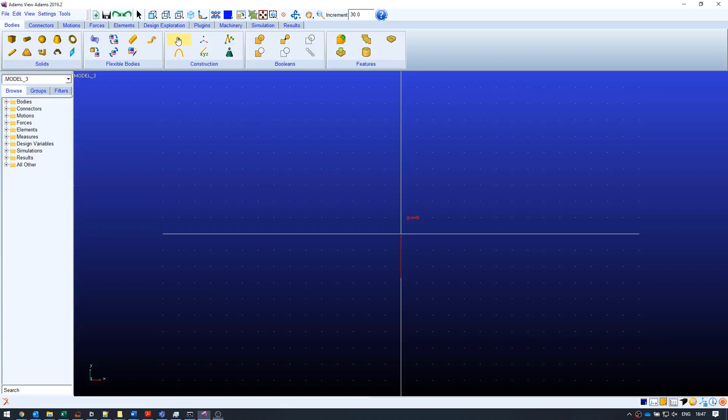We begin by creating 2 points to create a parametric model, and then we create markers on those 2 points. We will use these markers to define the beginning and ending of the beam. Now we start the Create FE wizard.

Select the define using 2 points option, and we select those 2 markers that we have created.

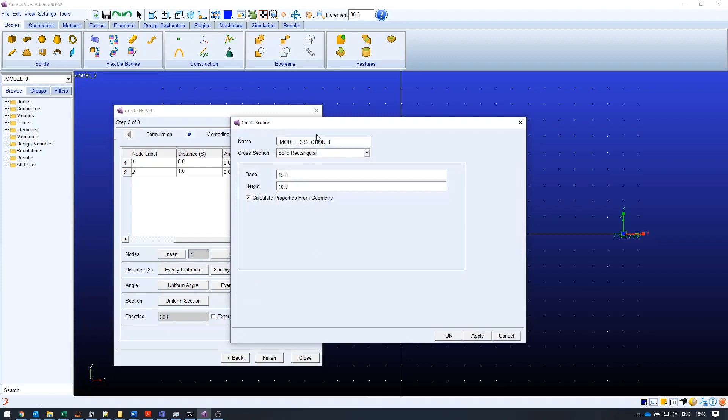Next form, where we now define the beam section. In the beam section we have various options, and we select the I-beam and provide dimensions.

You define the same section for the other point and preview the dimensions that you've provided. Now we can look at the model in more detail with a preview of the beam section.

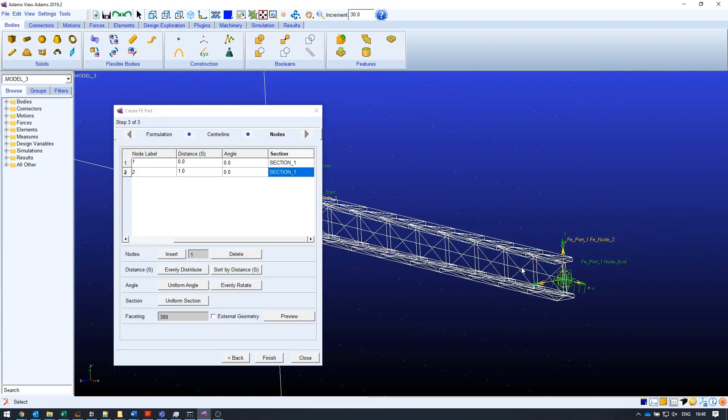You can also change the orientation of the beam by defining the angle at the various nodes.

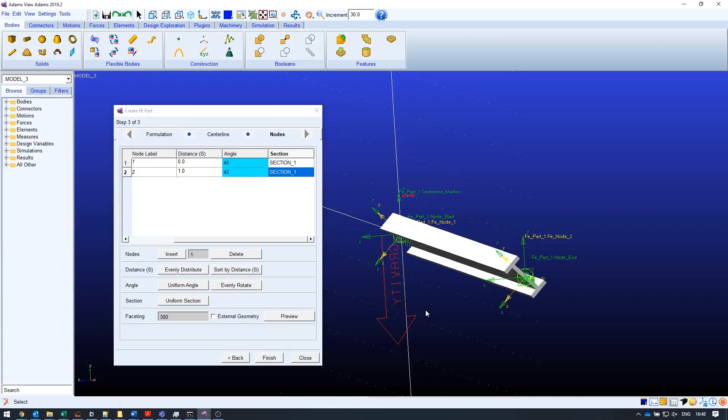To show that this beam is now flexible, we will add a solid part to the end that has a significant weight under gravity.

But first, let's create a fixed connection between the beam and ground.

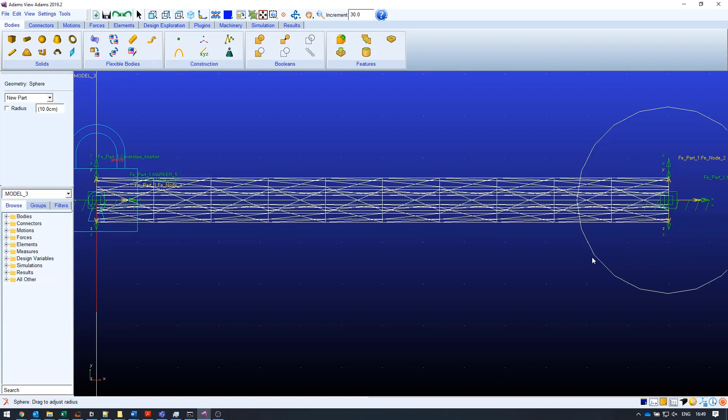And now we will create a solid sphere at the other end's location, and then choose a fixed connection between the beam and this new solid body.

Now the part is ready for analysis. So let's run a quick simulation and see how the structure behaves.

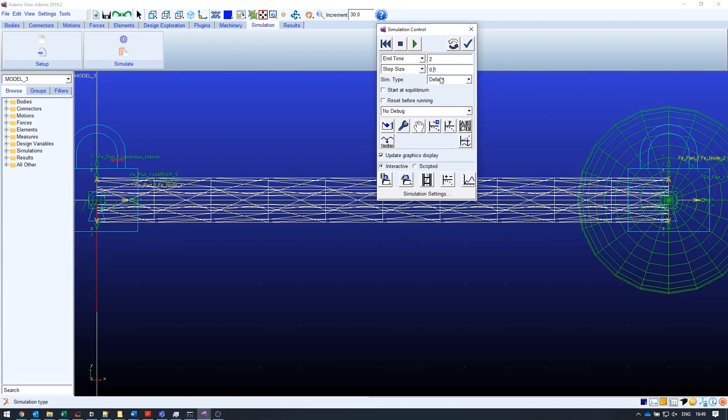And there you have it, a flexible beam defined between 2 points.